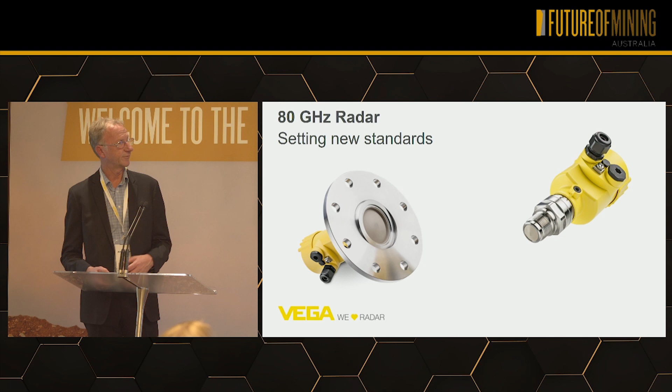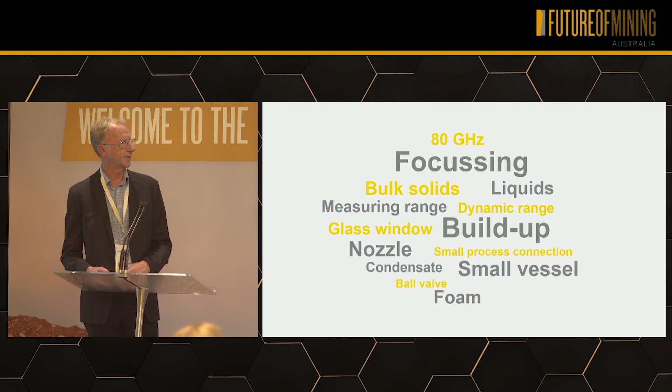What we've done now is develop the 80 gigahertz model, which is our latest generation of liquid and solid radar level transmitters. These are the sort of things that we picked up in the past that were not faults but challenges. So we looked at all of these particular feedbacks and said, right, we need to develop something that's going to overcome some of these obstacles.

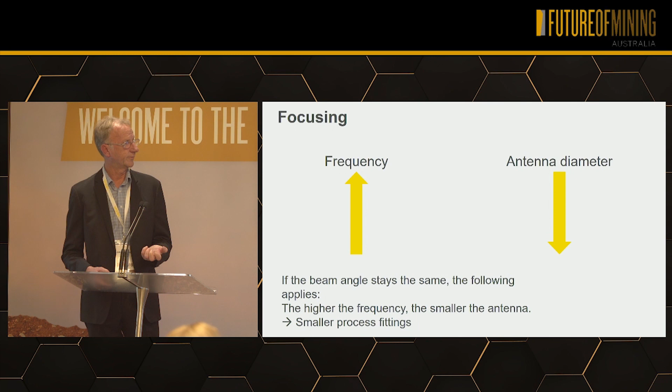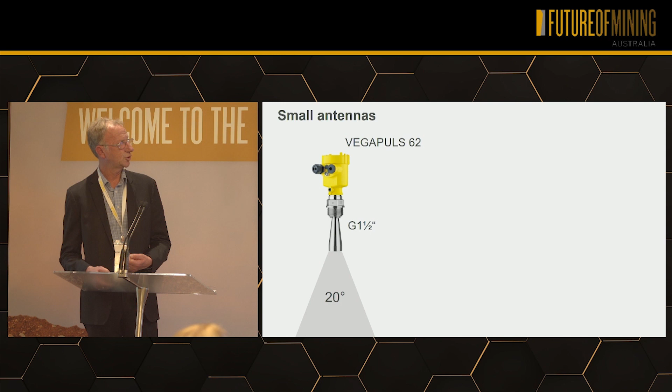So, principle of radar, as your frequency goes up, your actual antenna size comes down. The natural outcome from there is you end up with a narrower, more focused beam angle. So traditionally in 26 gigahertz, you had a fitting of 1.5 inch, or DN50, you ended up with a 20 or 15 degree beam angle. Now that we're bringing the actual antenna down to a 3/4 inch, you actually end up with a 14 degree beam angle. The larger you make that process connection or antenna, the narrower your beam.

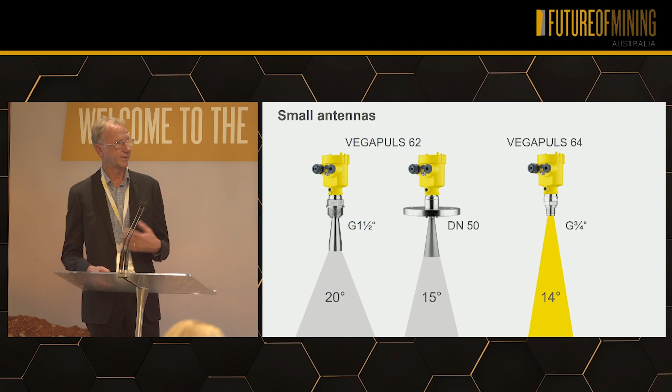So therefore you're able to get around a lot of obstacles, such as agitators inside vessels. You're actually able now to focus on your real level rather than picking up the echoes from the agitators. So if you look at a live example here from a crushing circuit, traditionally on the left was the 26 gigahertz model that had an 8 degree beam angle, had problems with picking up interference from the chambers, giving false readings and giving a slow response. On the right, we developed the 80 gigahertz, narrow beam angle, able to focus down the throat, giving you much more reliable signal, faster response.

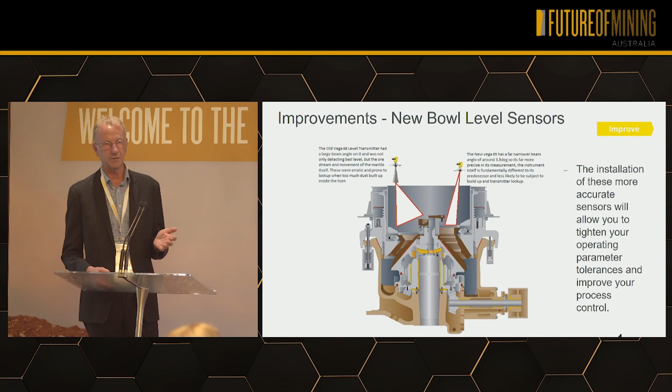So traditionally we had 96 decibels of dynamic range or energy from the system itself. With the development of our 80 gigahertz, you've now increased that by 200 times, or 24 decibels. So we're getting a much stronger signal back, so when we've got a lower or less conductive product, we're actually getting a better return of signal.

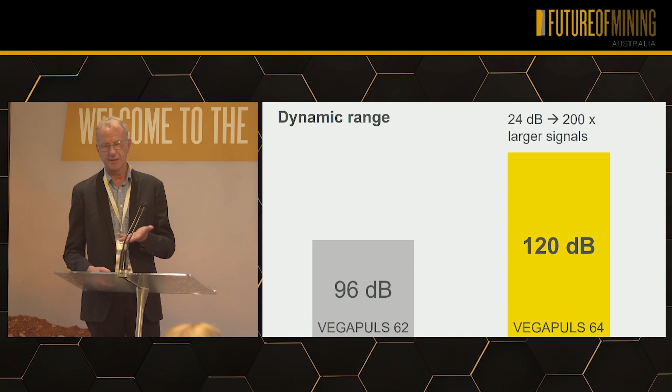So traditionally in an application for 26 gigahertz, you would send down your transmission and you would pick up off low dielectric materials a very small echo. You change that over now to the higher range unit, send down your signal, and you're getting a much higher signal return, so therefore you're getting a much stronger, more reliable signal from your materials.

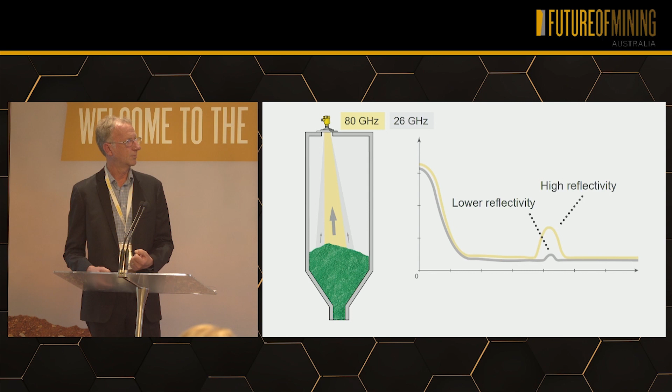Live example there, looking at a low dielectric material. The one above is our old 26 gigahertz, the one below is our 80. As you can see down there at the 25 metre mark, we're actually able to pick up that material. So that could be a lime silo, could be a low dielectric material.

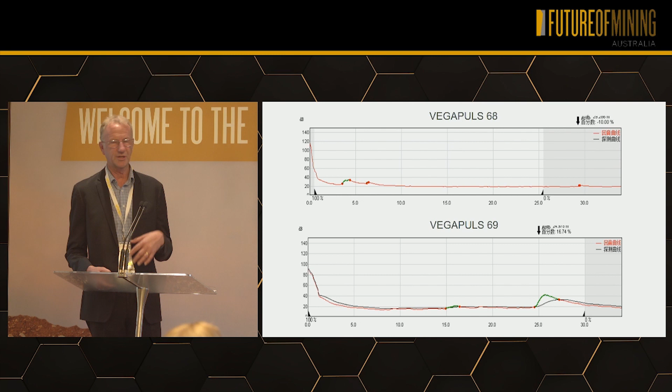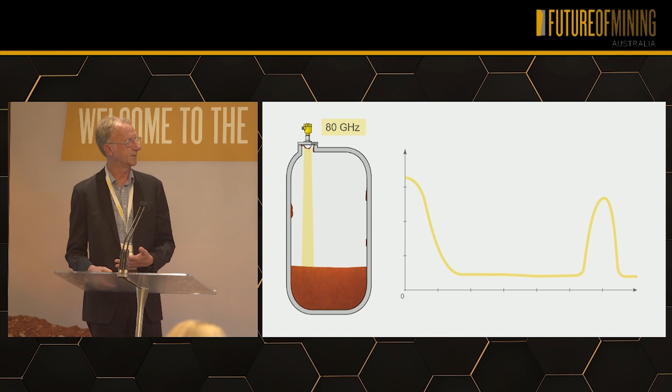Again, with 26 gigahertz, build-up inside the vessel itself that's inside the beam angle, it's going to see that build-up. Those build-ups can create false echoes, which means you get false readings. And the more build-up you have, the worse it gets. As you shift over to the narrower beams, you're getting a much stronger signal. You're not seeing the sides of the vessels, you're not picking up any build-up. One signal, one return. In comparison there.

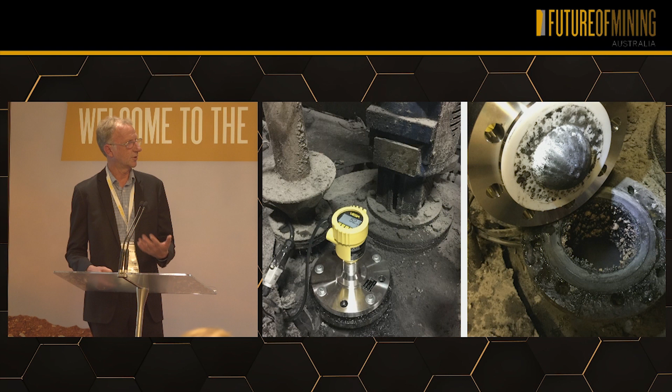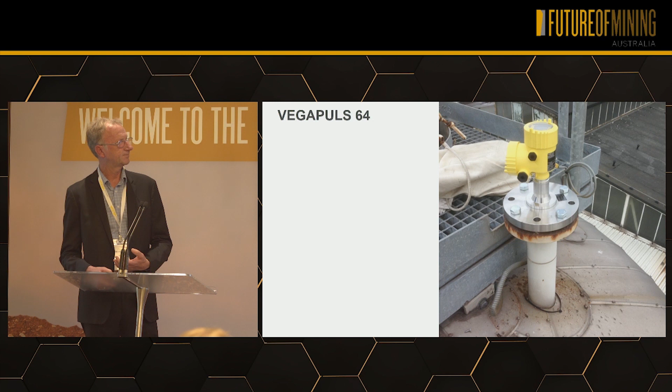Build-up, as showing here on a bitumen tank, where you've got bitumen on the face. You're not able to see that bitumen, therefore you're not getting a reflection from it or blocking the signals. We don't control how people install the units, but in these cases here, they're installed in large standoffs. Traditionally what would happen in these sort of areas is that you'd end up with a lot of ringing inside that tube before it actually came down and read the real level. Again, you've got so many different zones that it's focusing on, it ends up losing the signal.

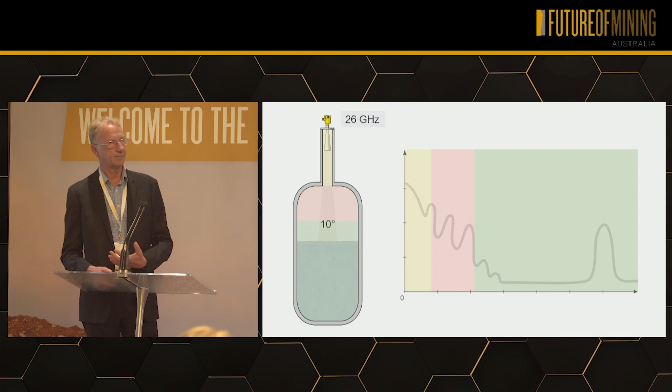Change it over to the 80 gigahertz frequency. We're not seeing anything inside the standoffs, and all the echo that we're getting is the one echo from the material itself, much stronger, much more reliable.

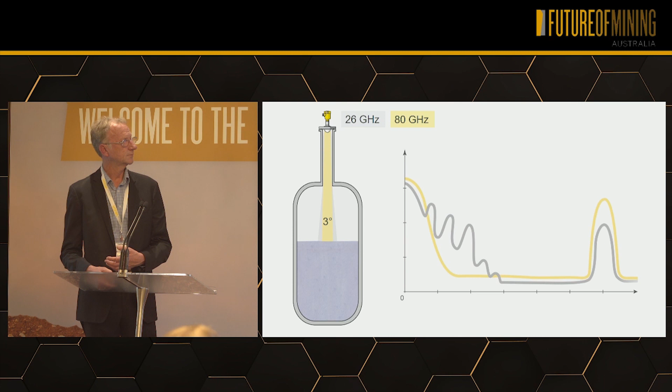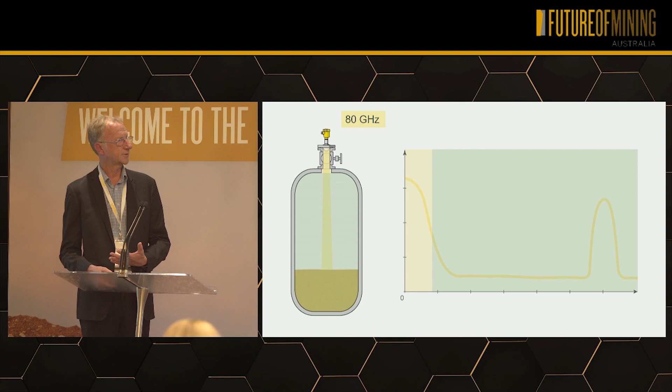700mm socket here, one single echo coming back, no interference. Lock-off valves, again the same problem, is that you're going to get a lot of ringing inside the valve stems themselves, creating really a situation where you don't even know which is the real echo anymore. Again, by changing over to a high frequency, you're able to get around those issues. You're not picking up those ringing echoes. You've got a much more reliable signal coming back, as in the example there.

Moving into another part is differential pressure. In differential pressure, we again looked at feedback, and we're able to now give a much more precise type of instrument. Bluetooth technology is something that the future is holding. We've been doing it now for about 2 years. Communication through smartphones, iPads, tablets.

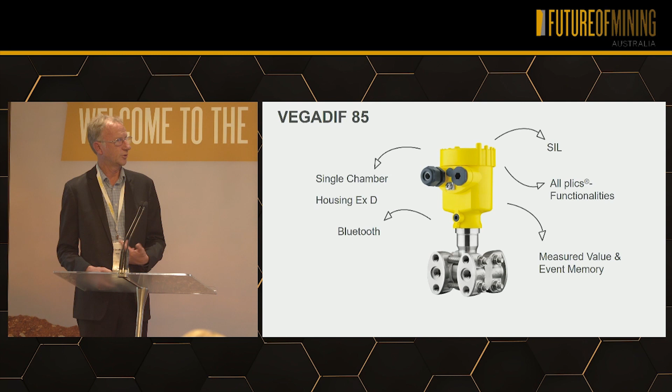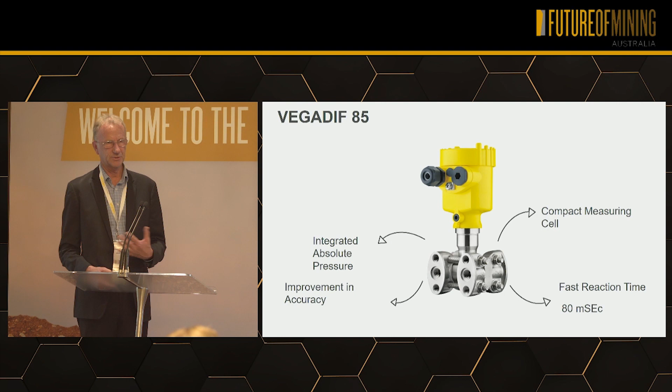Single chamber EXD, SIL approvals, and you get your measured value and an event memory, in other words, asset management. You're also getting 2 outputs, one for your differential pressure and one for your static pressure. So you can have them as 2 separate outputs, faster response times, improvement to accuracies. So again, development of a technology by getting more out of the technology.

Bluetooth, as I said, Bluetooth devices now across the transmitters. In an EXD environment, you're actually able to operate this through the glass lid, where you can do the programming with a magnetic pen. So therefore you don't need to go in there and break the integrity of the EX area.

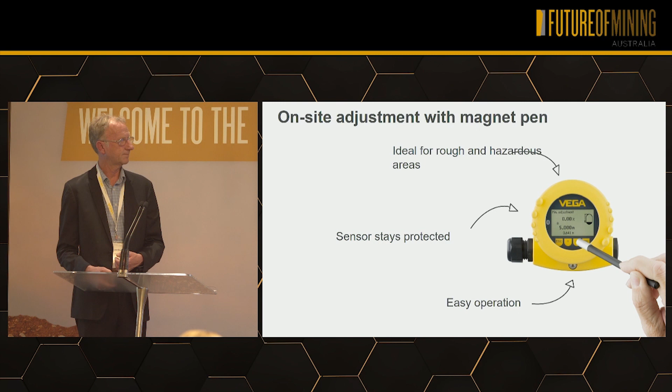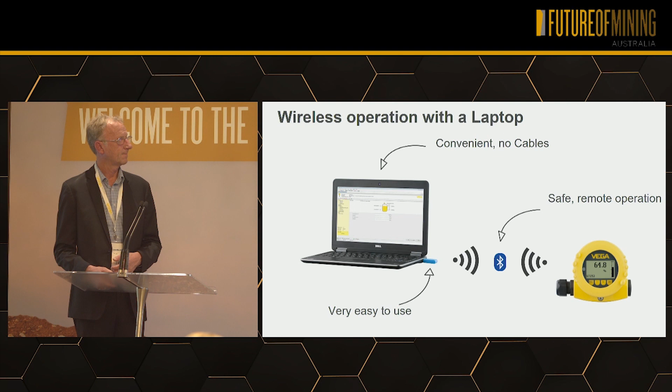It can be done by a laptop, Bluetooth 4, communicating directly to the instrument, roughly about a 20 to 25 metre range. It can be done through a smartphone or a tablet. The apps are downloadable from the app stores, they're free of charge, and you just communicate through, and away you go.

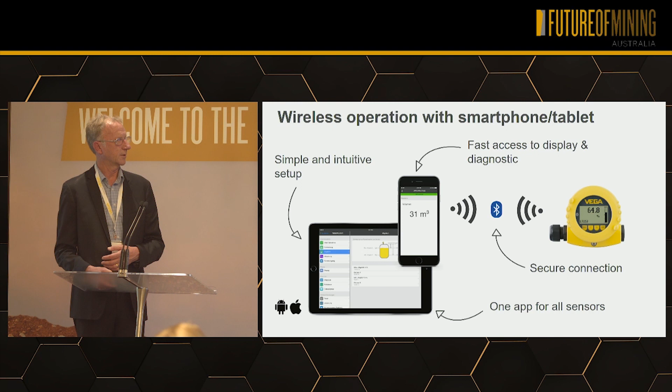Industry 4. Traditionally what we've looked at with Industry 4 is the 4 stages of industry development from 1784 right through to today. We've looked at the fact that you've got all your different levels of communication and management. What we've had to do here is look at the fact that everybody has access to the same information, through a cloud service.

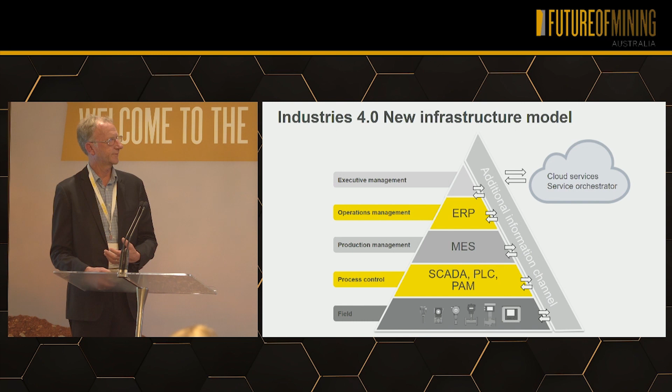Traditionally it's been done through HART, Profibus, Bluetooth communications. In the signal conditioning, through Ethernet or Modbus. The future, which is under development now, is Profinet and OPC UA. If we look at mobile communication through the networks, GSM and GPRS are all available, or through router systems, Wi-Fi, Internet, Ethernet, Bluetooth. Again, under development, and heading towards 5G networks.

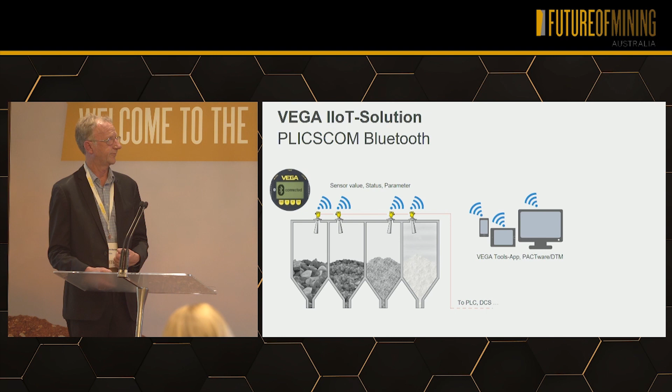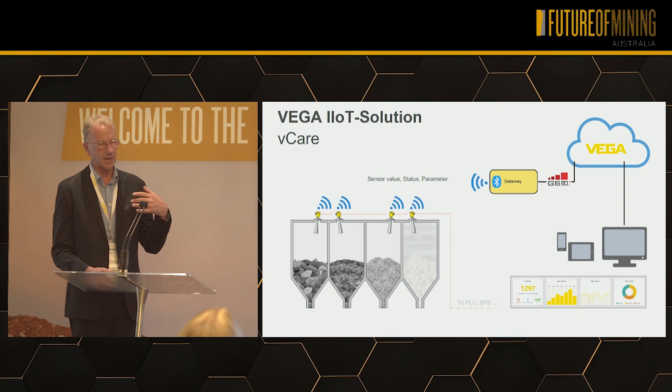Traditionally with Bluetooth communication, it's a case of accessing the information so that you can keep maintenance, stability, everything like that with your instrumentation. So this is a communication, not an output. The development now is through a Bluetooth gateway, where that information can be uploaded to the cloud, and then you can access it from the cloud. It can be displayed remotely. So it is a case of developing Bluetooth now as an output path as well as a communication path.

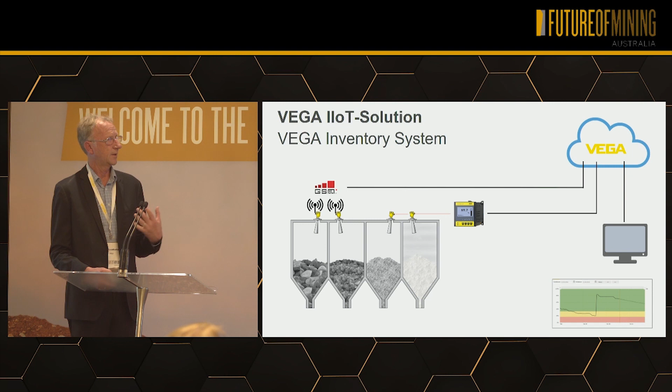Wi-Fi networks, hardwired networks all go up into the cloud, and that information can be accessed remotely. Again with Bluetooth, up through the gateway into the VEGA cloud, and that can be accessed by third-party systems. So again, development towards third-party access through SAP, OPC UA, where you're able to access your own information and control your network and your instrumentation.